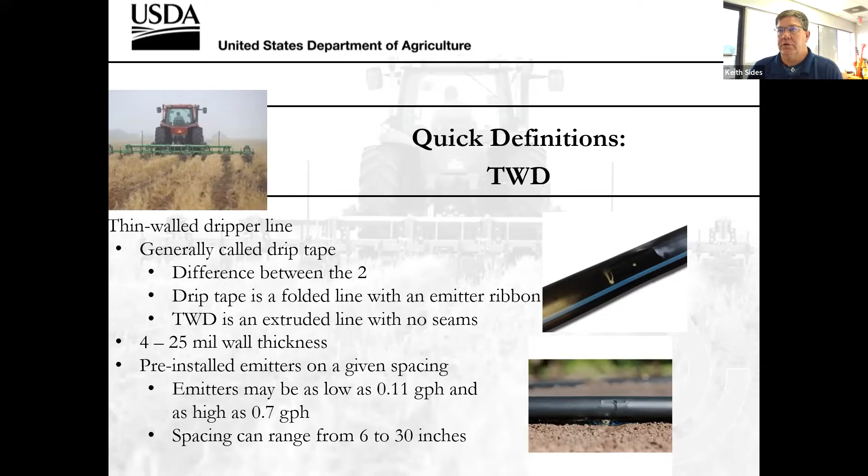This is probably what the greatest majority of you will be using. It's a heavy wall dripper line. You'll hear it called dripper line. You'll hear it called poly line. There's as many names as there are people out there for it. Again, this is an extruded product. It doesn't have any seams in it, so it's just like a piece of PVC pipe. There's no seams. There's no breaks in the wall of it. These are a heavier wall. They're 30 to 35 mil wall thickness. You can get some heavier ones, but then you start running into some different issues with it.

It can come with or without emitters. So if it doesn't have the emitters in it, it's called blank tubing, poly tubing. And what that does is that allows the users to actually put in the emitters wherever they want to and however many they want to at that point. You see these a lot on tree lines, shade trees, windbreak trees, where your spacing between the trees may be 8 to 10 feet between a tree or between two plants, and you don't want to be using that water in between, especially if you're in a limited area, or if you're going to be using your water that you're going to harvest from the rainfall. You don't want to be using that water on something that you don't want, just on blank ground out there.

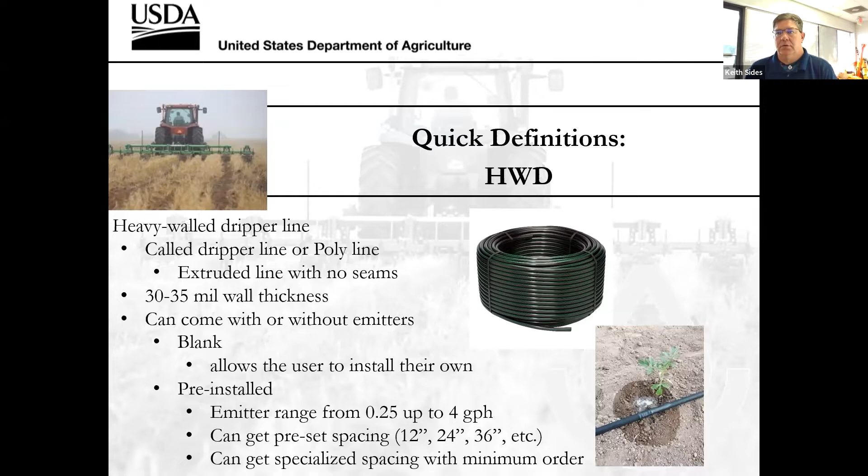So the next part, you heard me talk about emitters. There's 2 styles of emitters. There are PC or pressure compensating emitters. These are really nice for individuals who don't have a lot of practice and don't have a lot of experience with drip irrigation. They work for these individuals because they give you the same amount of water over a fairly wide pressure range.

Most of the PC emitters that you're going to be dealing with and will have access to, they'll start going into that compensation mode at about 6 psi. So you're talking fairly low pressure on that one. And most of them will stay in that compensating mode or have the ability to stay in that compensating mode up to about 60 psi, which is kind of what most people run in their tires on their cars.

Some of them are a little bit higher, some of them are a little bit lower. That is all based on how the manufacturer has set theirs up. They can be pre-installed either in the thin wall dripper line, there is a thin wall dripper line that uses pressure compensating emitters, or in the heavy wall dripper line where you're running a little higher pressure, a little longer runs, or again, you can put them in yourself to put the water exactly where you want it and nowhere else.

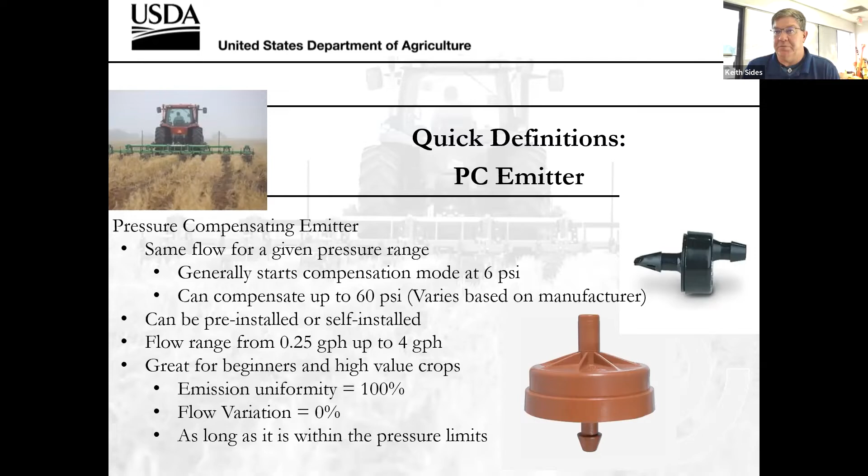On the other end of the spectrum, you'll have your non-PC emitters or just your standard emitters. These are really nice for small runs, flower beds where a little bit of extra water, a little bit less water isn't going to hurt you. They do vary with pressure, and they're not going to vary a lot. When I say vary, I mean we're talking tenths or hundredths of a gallon per hour. So generally these are rated at a certain flow, say 2 gallons per hour at 10 psi. And the easiest way to maintain that 10 psi is with a pressure regulator. We can talk about those here in just a little bit.

What you don't want is for that pressure to drop below 10 psi, because on most of your emitters, they go into what's called a laminar flow, a very, very smooth flow. And so it doesn't burn the pressure and it doesn't stop. It can actually speed up the flow through the emitter, so you can actually get more water out at a lower pressure. It uses turbulent flow. If you've ever seen one of these emitters, they look like they have a labyrinth or a flow path that does nothing but drive back and forth, back and forth. All it does is create turbulence inside that emitter to burn the pressure so that you get the right amount of water when it comes out.

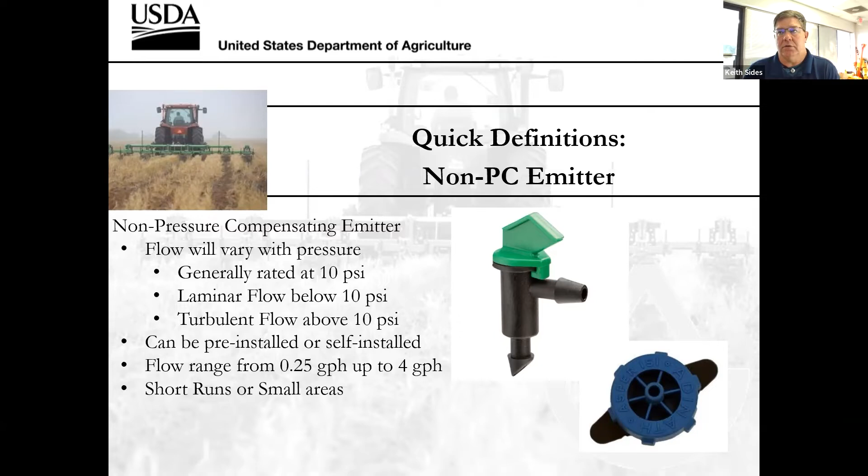Again, these emitters can be pre-installed on any kind of given spacing, 12-inch, 24-inch. It just kind of depends on what you are looking for in your application. And they can go up to 4 gallons per hour. These are really nice for small runs or short runs where you're not going to have a lot of pressure difference from one end of the run to the other, or one end of the row to the other. Flower beds, flower pots, that kind of thing is where you're looking at these non-pressure compensating emitters.

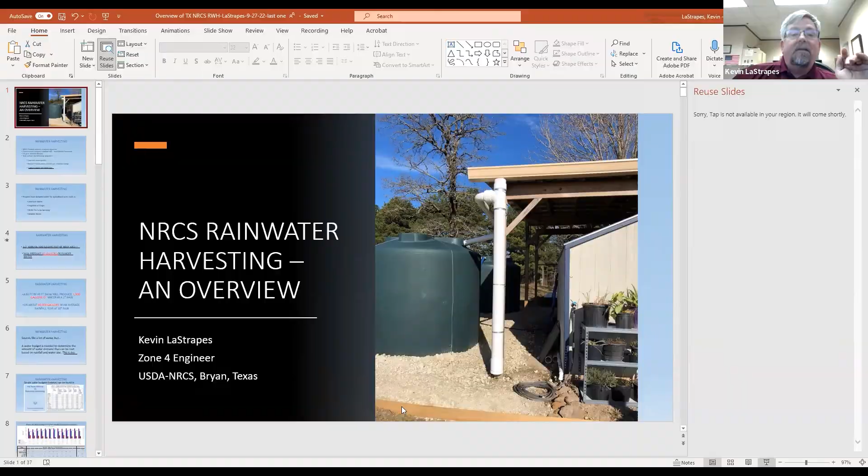Great. Okay. So here is a little East Texas system for someone who just has a few acres north of Palestine, near the huge metropolis of Montalba. They have some gardening aspirations, truck gardening for profit, but they're slowly building. They're also raising a family. They work day jobs, and they've been doing this on the side.

And this was a system where they were able to use one of their sheds. Their little RV is back here, and there's their garden shed here, and they've been experimenting with it for their own use, friends and family. They haven't really sold anything yet, but that's been their decision. I got to go on a review visit with them a year and a half after they installed it, and they were just super happy with it.

And I asked them, what would you do differently? And they actually said, well, I'd make it larger if I could afford it. So they feel like these two 2,500 gallon tanks fill up routinely, but we're in a rain belt of 40 to 45 inches there in Palestine. But just to give a little background, and then we'll get back to real pictures of real jobs.

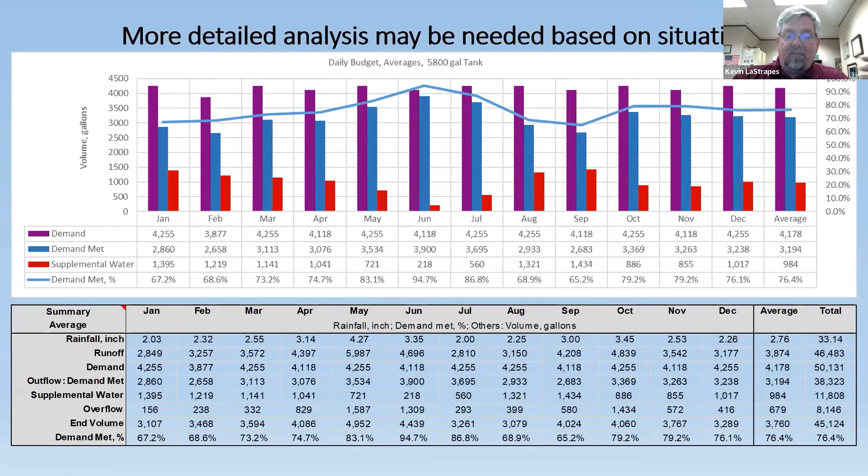You just have to make the best guesstimate you can. And we use this rainfall data to come up with the percent demand that you're likely to meet in an average year. This one actually got close in June, because wherever this location was, that happened to be one of the higher rainfall months historically. But it would vary, based on where you're at.

So that was a note to myself to do, and I didn't get the time to do it because that was where my jobs were. I was going to show you the real info from my job. I've seen them down as low as 30% meeting the demand because their irrigation demand was so high.

Well, if you're paying a rural water system a water bill, and you can take 30% off it every month, and it's not always a direct correlation, you will get a savings, even if on average it ends up being that much effective water from the rainwater harvesting system. It's just something that you have to make plans for, and then manage it the best you can as it actually rolls out each day, weather-wise.

And Mr. Wade, if you don't mind, so it'll save time. Any question you see that comes up in Q&A that is something about the slide we're talking about or the topic, I don't mind stopping and talking about it right then. If you just want to say, "Hey, Kevin, I got a question," I won't consider that interrupting at all. There's always going to be something on my slide people can read if they're not interested in the question.

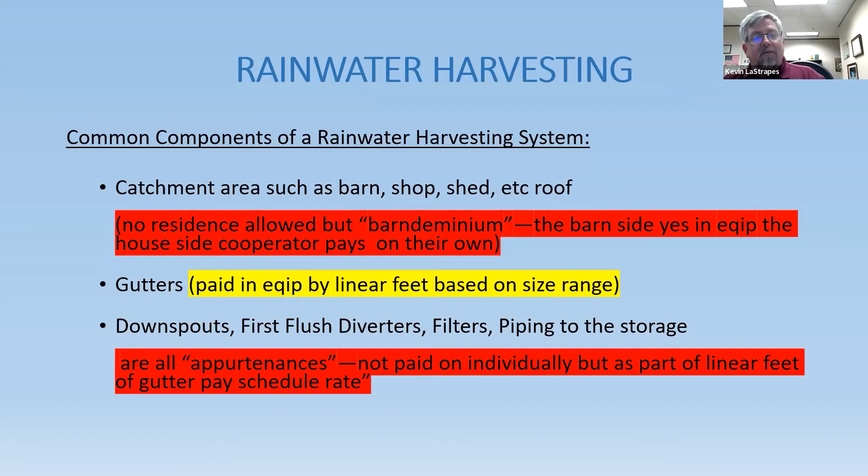So I'll just say, if y'all ever do work with us in EQIP and you want to share your costs with us, we will sure take that information, keep it private, and use it to fight for better cost in Texas. That's kind of what I've told the folks in my zone, and what I do in working with our cooperators on every kind of practice, just to bring some reality to what the economists are getting from cost guides and different inflation rates and stuff like that.

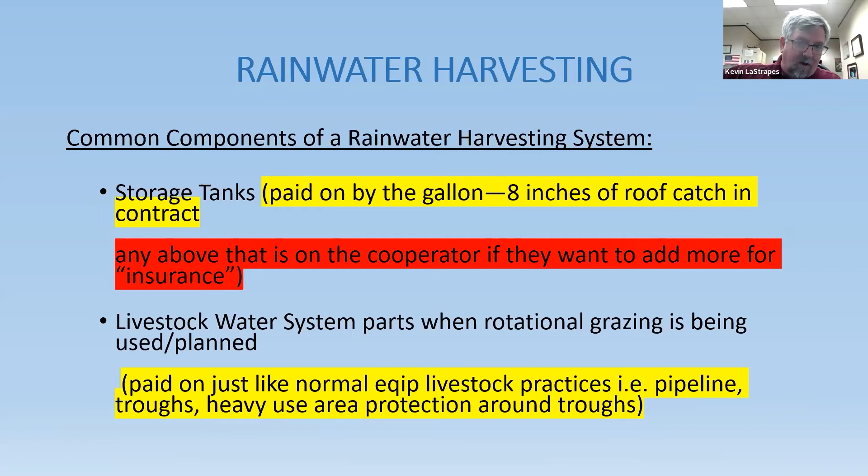The storage tanks are going to be paid on by the gallon. The gutters are going to be paid on by the linear feet. And then the livestock water system that you hook up that water to is going to be like a normal livestock water system. In fact, like I said, you need the reliable thing. You're going to have your well hooked into your livestock water system, and this is just going to be supplemental water, but they'll both be plumbed in. That was what our one producer did, and I'm going to show you his system later.

So the catchment area is any roof. It doesn't have to be the barn roof. It could be a shop roof, it could be a shed, anything that sheds water that has a sturdy enough side to it that a gutter can be attached. If it's a metal building, you can attach it to the truss ends by welding or screwing it in with metal screws, or there's wood fascia boards that get screwed in. It just depends on what building you're trying to gutter.

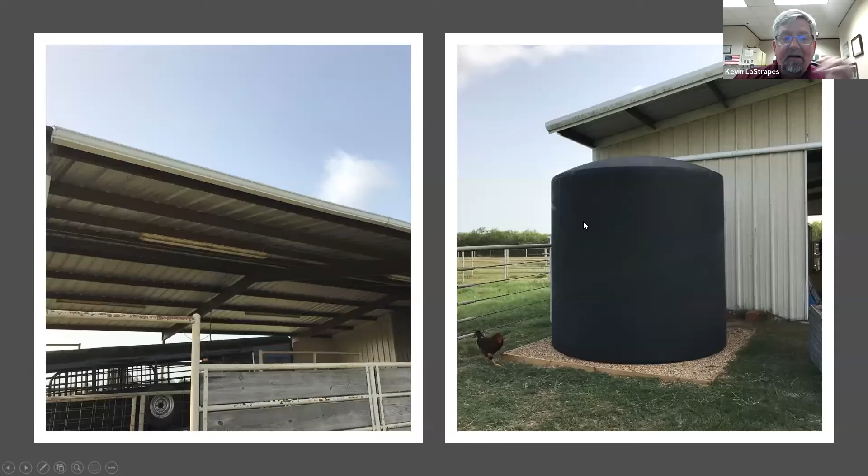So here is one that was, I would say, a very small scale livestock water guy. He was not doing any irrigation. He was watering more than that one chicken, I promise. But he had a little part hay barn, part animal protection barn right here, and got it guttered on both sides and ran the water. This long pipe here is coming from the right side of the building. And then he has a configuration over here on this side to catch it and put it in this storage tank.

Notice we also like to have a good solid, stable foundation. This is batter boards filled back with pea gravel. And it worked great to have a nice flat foundation for his storage tank.

I have a quick question. Sure. Just while you're hitting that, sorry for the interruption there. No interruption. There's a question that says, should one be concerned about building a foundation after installing a rainwater harvesting system?

Just for the storage tank, because you don't want it to get uneven on you and have erosion around it. So we usually try to get a nice foundation pad. Some of the manufacturers want you to cable it down. You'll see a picture where one cooperator needed to do that. Personally, I think the weight of the water is going to keep it down, except maybe in West Texas, it might need cable down, because in a drought, when it gets low and empty, they actually will move. The wind will move them. So it's not like it's not possible, but it's more possible in West Texas than it is in our part, in East Texas. But again, it's an appurtenance of the storage tank price.

Okay, so here's another question that's in the Q&A, and I'm not sure if it's something that we should forward to you later on, but I'm going to read it anyway. Okay, go ahead, in case you want to answer it now. I'll put out this table and other stuff so y'all can just read it while I'm answering this question, because this is just purely informational. Yeah.

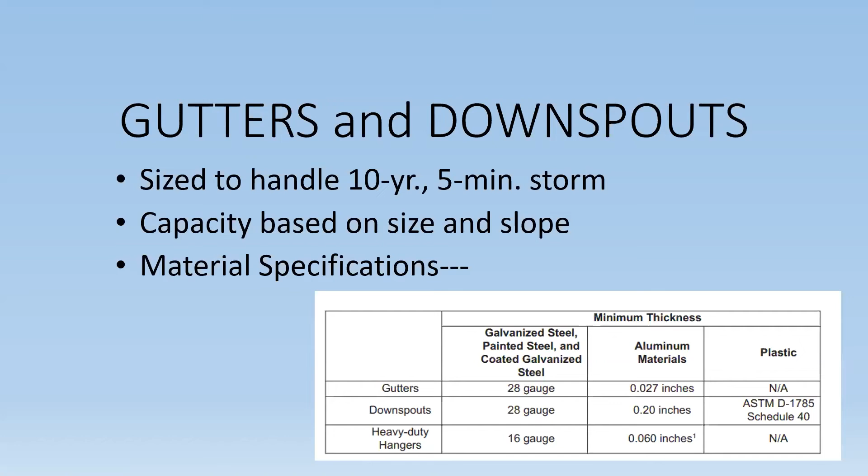Okay, appreciate it. So it sounds like this person has a 30 by 47 residence with a 20 by 30 carport storage area, all with existing gutters. What would be the other required monetary outputs for the landowner? So am I understanding, do they already have gutters on the whole residence and carport? That's how it reads. It says all with existing gutters. Well, if they do,

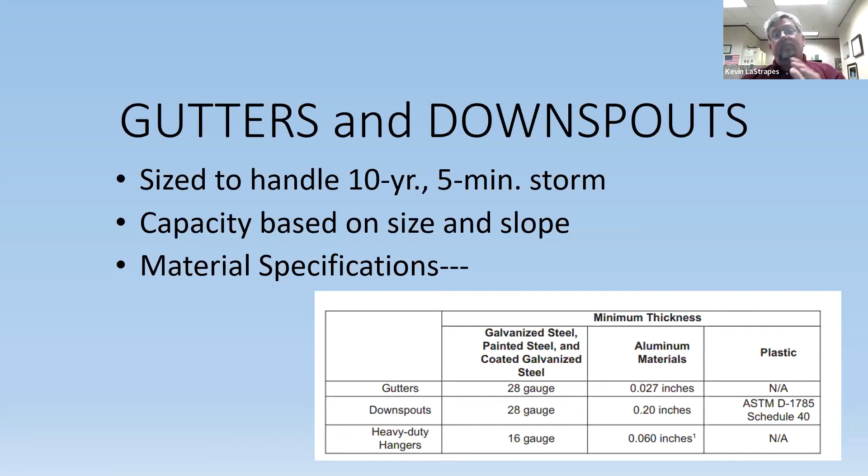Willie and his fellow planners, and he was a former planner, y'all, before he started doing what he's doing now, they would just have to work with you on what would make a good or an allowable contract bid, I guess. But I'm thinking you might need to add one little ag building to that scenario and collect water from everything. If you've got an ag use for the water, then that's reason for collecting the water. But you have to have 558 in there.

I haven't seen a storage tank only EQIP contract. I'm not saying it's impossible, but it would be something that would need to be discussed and worked out. But we are totally open to taking whatever resource.

I mean, we have a fancy word for it: resource concerns you have when you walk in our door or call us on the telephone, and we want to go out and visit your place, get to know you, get to know what kind of economic enterprises you're considering, and help develop some good alternatives for you to go there and achieve that.

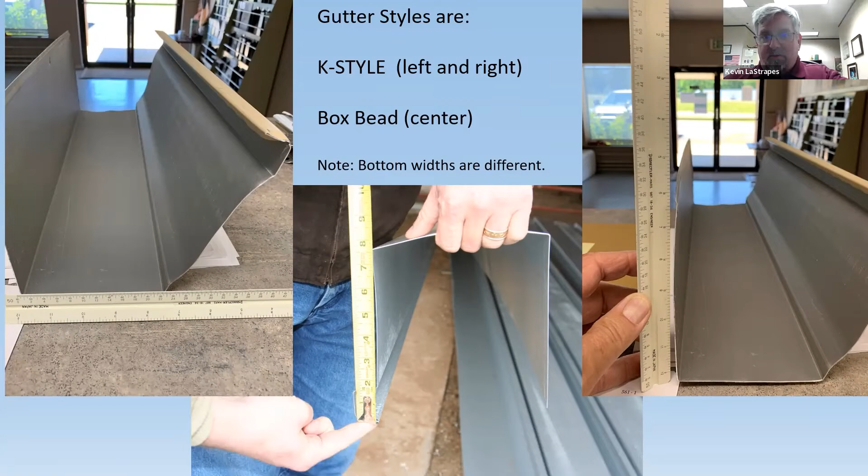And it's not a whole lot more that a box bead will carry, but basically what my cooperators have done is shop around for whichever's available and cheaper per linear foot, and that's the one they're going to get. And we always give the option of what's the smallest K style, so like a 6-inch K style, and a 5-inch box bead will carry the same amount of water usually.

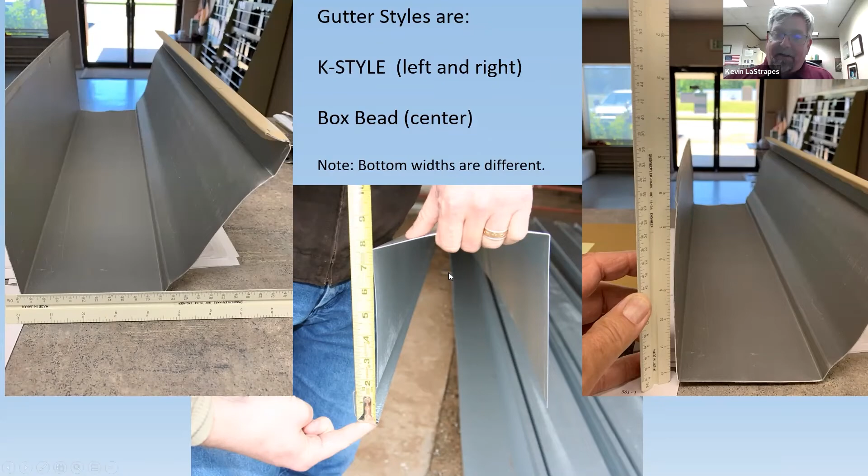But if the 6-inch K style is cheaper, you should get it instead of hunting for the 5-inch, just because you think in your head, oh, 5-inch is going to be cheaper. Not always. So there is a lot of research.

And here's the Palestine lady that did her own project and bought the parts. She and her husband put this stuff up. And that's where you can kind of see, you've got to use your imagination. It looks like a K, I guess. I never can see the things in those pictures, but it definitely looks more like a K than a box. So I'll grant them that. This was a K style one. And she's just showing the different dimensions there for the photo.

This part right here under the gutter, you're about to see the inside of it, is the downspout. It's a very short one into the collection pipe. Oh, there's my little question. Do you see the K? I talked ahead of my little thing.

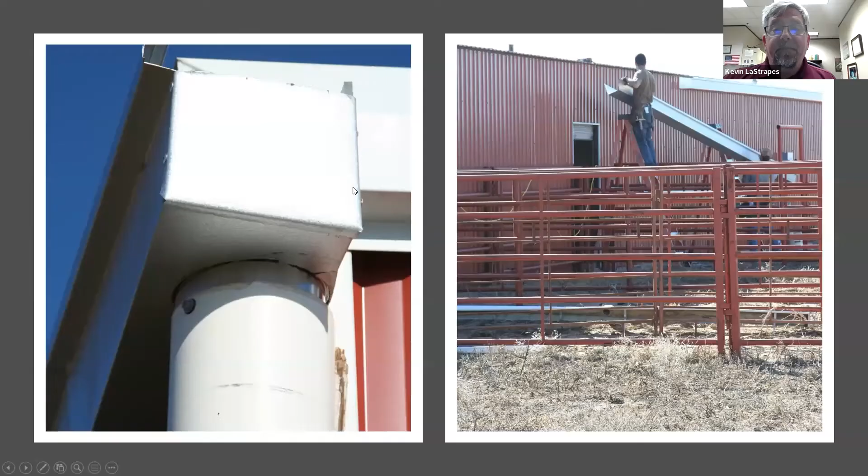So now we go out to West Texas and we see that box bead installed. And both kinds will have the supports, and then there's a screw, you'll see a picture later, that goes into the fascia board, or a metal screw, and keeps this supported into the wall. And here they are installing it.

This is the true box. Do you see the box? Well, yeah, that one's easier to see, I think. And that looks like a little K there because it's leaning out. But as soon as they put the brackets on top, what kind of looks like the K in the other one is more like a batter board, where the water runs off the roof and has to come into the gutter instead of jumping out of it.

That's your main goal with the size of the gutter: for most rains, that 5-minute intense rain that you saw as our design rain is what we're trying to catch and flow in these gutters so that you don't have spillage. You're trying to minimize spillage out of your gutter.

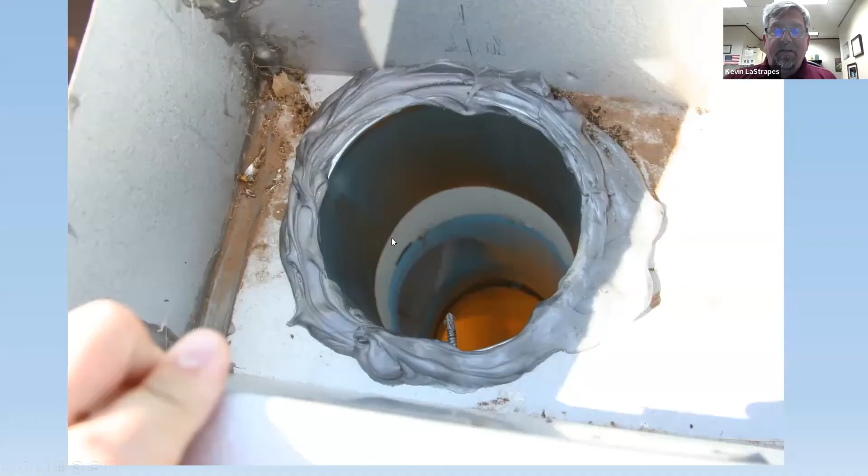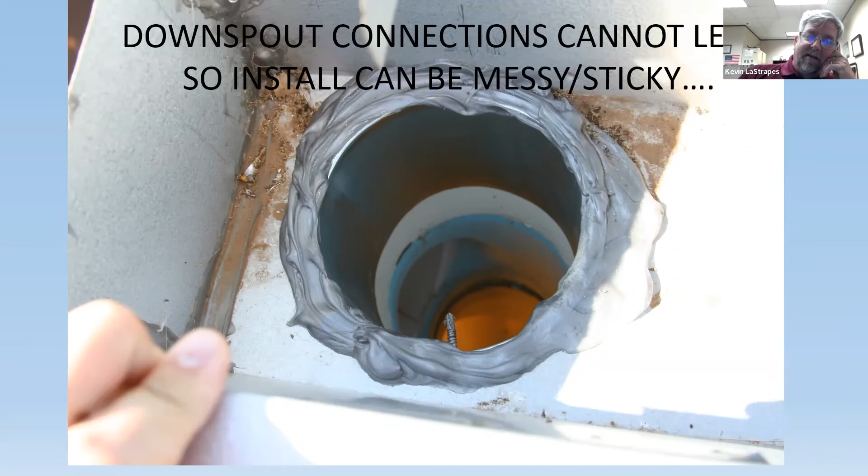And then, with anything with water, you've got to have good seals. It can get messy and sticky when you're having to put the mastic and whatever to get these kind of deals, because sometimes the plumbing parts are not the best fitting, and you have to use unlike materials, metal to plastic. It works, but you have to do a little extra effort to make it fit snug and not leak.

Now, the thing that this will go to after the downspout and before it goes to your tank: that first rain, just like the first rain when you're driving on the road is the most dangerous part of driving. Well, you have a lot of yuck on your roof that you don't really notice until you start to collect it in a storage tank. And you don't want that to go in your storage tank.

So you use gravity as your friend, and you make a large enough pipe that the water has to travel over and drop in and fill that pipe. And then settlement happens, and the sediment and trash will go on down to the bottom of the pipe. Okay. And that's what your goal is. And at the bottom of that first flush, you have a clean out plug.

And I meant to add that most people decide it's best to drill a couple of holes, like weep holes, to just let the water out of that so that they don't have to go and get any plastic or metal pipe, grooved pipe cover that you're supposed to hand turn. Well, the day you put it on, it'll hand turn that afternoon. Three days later, you've got to get your wrench to get it off.

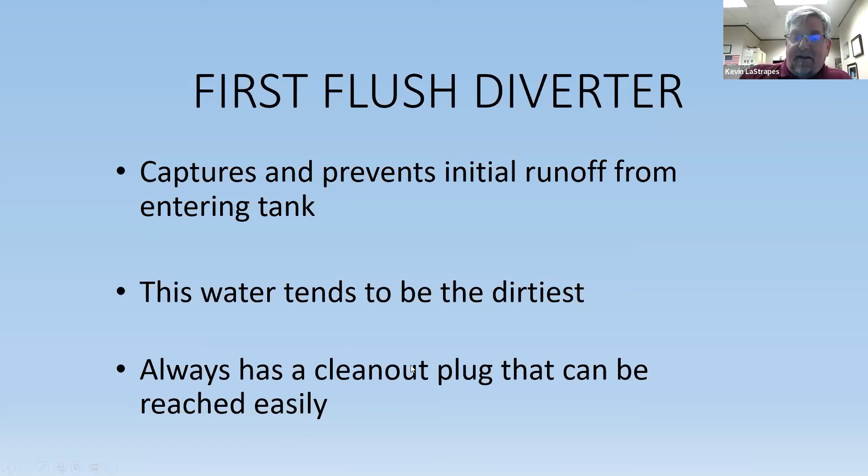And so they found a practical thing: drill some weep holes, and they only have to wrench it off to get the crud out every two months or one month. It just depends on how many rains you get and how dirty the roof was. And they kind of work with the system. And so this is what I'm talking about, the square wrench, pipe wrench kind of clean out that you can take off if you need to.

So here's our biggest East Texas producer system. And he has 4,500 gallon tanks in his system. So really big, right at 27,000 gallons he's collecting, but he's trying to water a regular size herd of 20 plus cow calf and not use his well water that much. So it's gonna be interesting. I've kept a relationship with him. He's only had it in this drought year, so it's not a good year to tell how much it's helped him.

So Kevin, is it important that he used 6-inch or 4-inch gutter? How did that play a part in determining the gutter that you're going to put up? Yes. Okay, so that'll be part of our design process: to put a little slope in the gutter, put strategic downspout locations, so you can shorten the amount of catch, so to speak, out of the gutter that you're going to get, and that will keep your gutter sizes down if you have a really long roof.

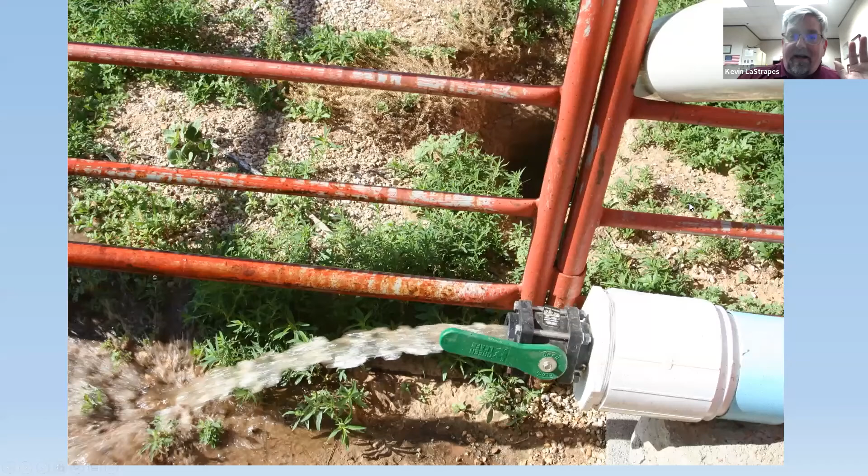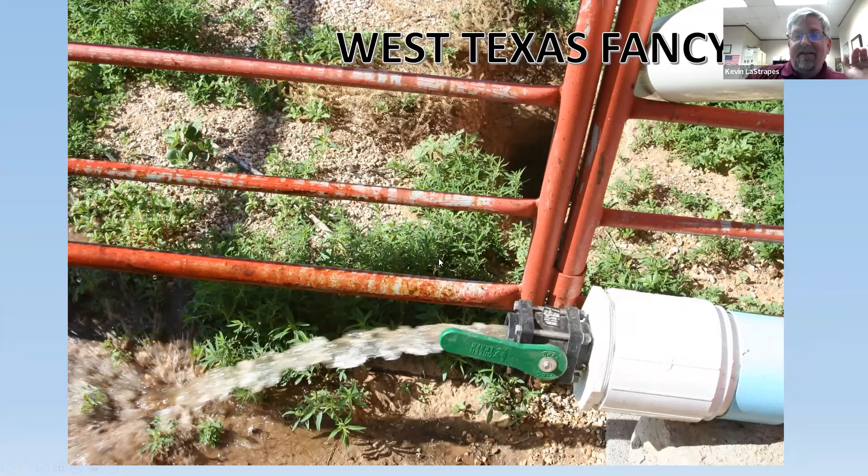And in my thing, I can't see the bottom of this, but you're going to see this is the West Texas one on the right, and they just do things a little fancier out in West Texas. This is his, not weep holes, but an actual irrigation valve that they put in to their first flush to drain that water off. And you can see it looks fairly dirty. So that's been working for them.

Now, storage tanks, size of tanks can cause you some challenges. You've got to design them based on the height of your building because gravity is your friend. Elevated tanks, we haven't gone there yet. Don't think that's going to be cost effective. So we try to make it where they will gravity flow from the edge of your roof into the tank and through some type of piping on maybe the side of your building, to get it over to the tank.

And then we always put an overflow on these rainfall storage tanks. We also do it on our livestock water storage tanks. But the reason we do it here is there is always going to be a storm that you weren't expecting and above the design of the system. And you're going to, unfortunately, quote, waste some water. You can try to route your overflow pipe to something useful if you want to, your goldfish pond or whatever, but you definitely need it so that it's not coming out the top of your storage tank, but it's routed somewhere.

Also, we found out just in the last year that manufacturers are getting a little more picky about requiring anchoring, but in particular, flexible PVC hookup. The Enduraplas company particularly has said that with this East Texas guy that I'm showing you pictures of, and he had to buy this flexible PVC hookup. Not very expensive, just a different way to go from the bottom of the tank into your buried line that's going out to his livestock watering system.

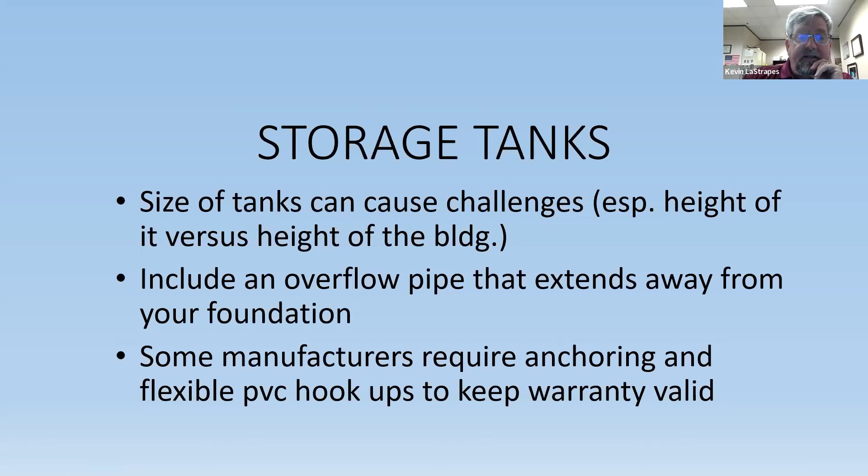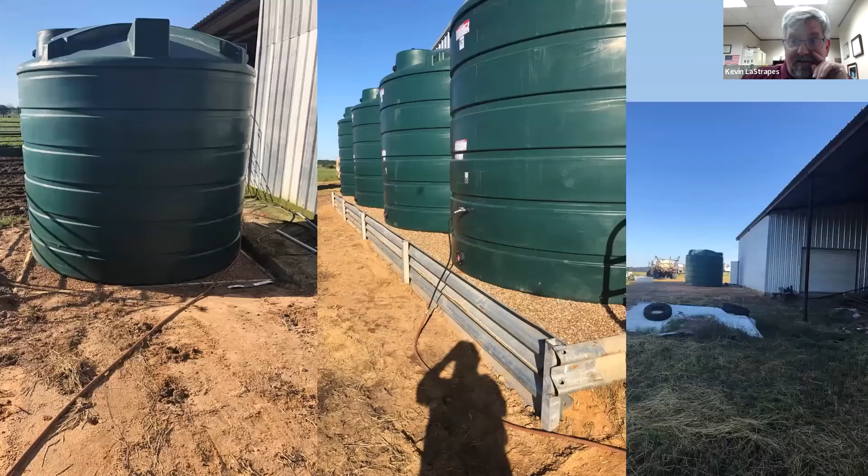So here's that big West Texas system. You get a picture of how big their barn shop animal resting area is on both sides, and that they have 4 tanks that I think are 4,000 gallons. So a little bit smaller than my East Texas one, but big. But just because I serve East Texas, I'm going to say we're bigger. At least on this job we were.

And so here he did the work himself, y'all. So you notice nothing's hooked up to these tanks. He went and bought those tanks, went and hauled them himself, and put one up at a time. Did 4 of them, did all this work before he ever hung any gutter and collection pipe. That was his mode of work that he decided to do. And it worked out well. So each individual can decide how they want to install the system.

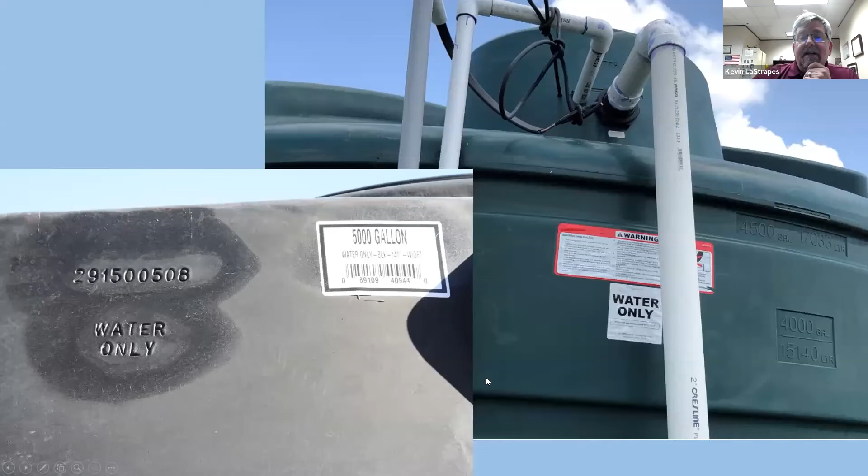Just work with the NRCS office and the staff will help you plan it out, based on what your circumstances are. This little hose here is purely his need-some-water-from-his-storage-tank hose. And that was just my little brag that they have 4 5,000 gallon tanks. I'm sorry. So 20,000 gallons total. And we had 6 4,500 gallon tanks. So it was bigger.

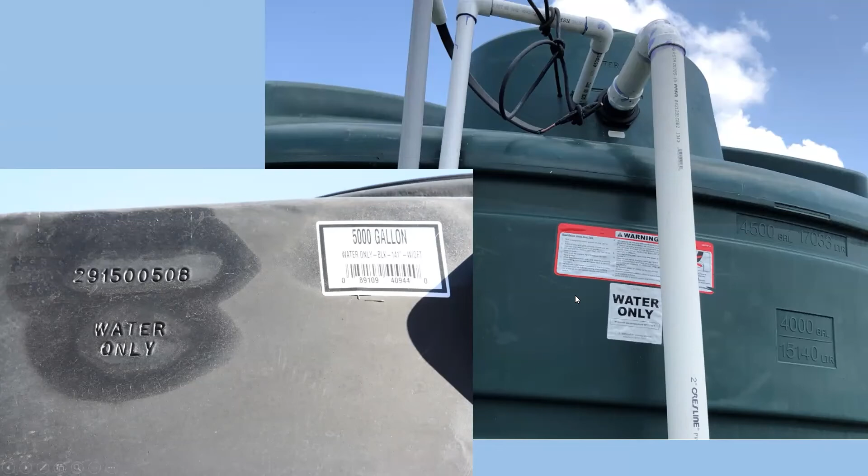And then here they are side by side looking at the stamping that you'll get on them. The left one is a Norwesco tank. They're also marketing a rainwater tank under... no, mine's a different name. It's going to show up in one of my slides. Wadley or something like that. It's some Wiley odd name. Wiley, that's it. Thank you, Keith. And it's in Duraplast.

Now, this stuff at the top is operator designed. He wanted a system that would fill his tanks with well water when the rainwater wasn't happening. So he has ability for rainwater to go in here. Because he's depending on this for his livestock water, y'all. And it happened to be that his barn was in a high part of his property. Everything can gravity feed from it. And so he wants to distribute from these tanks into his livestock water system. So he has it automated to sense the level in that tank and come on and add well water when needed.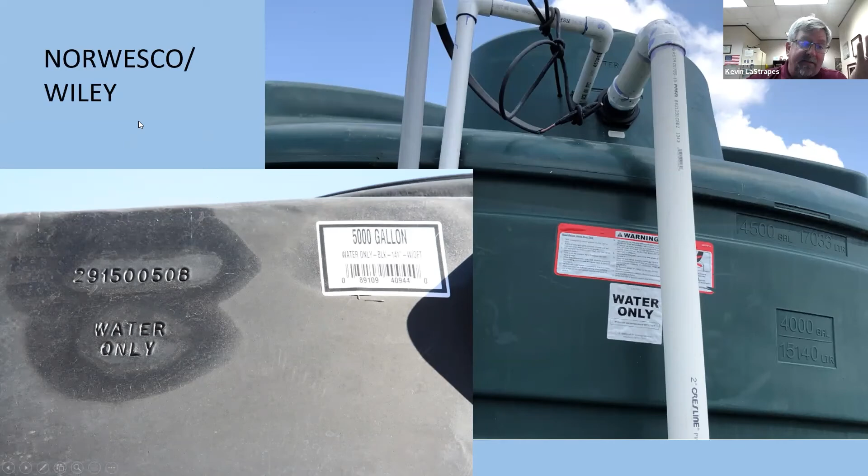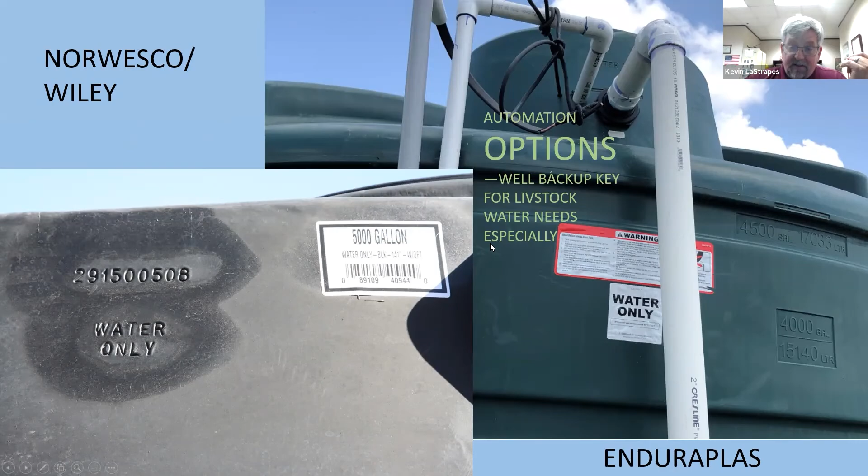So, oh, there it is. See, I just didn't press my thing. I had put it on there. Norwesco and Wiley and automation options. So there's again, plan a backup.

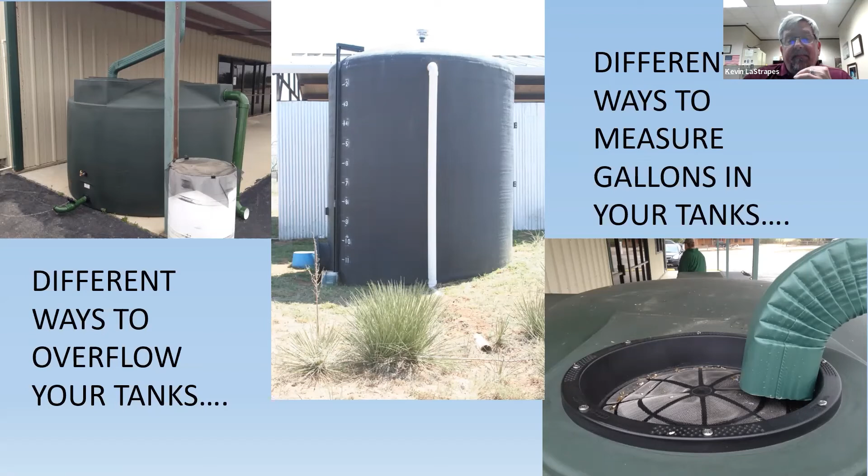Well, we would have to be able to get the water into the gutter. That's the key thing. I didn't show a picture of a building on my aquaponics place here. These two pictures on the left are from a really neat aquaponics nursery that did a rainwater system with us here on the edge of Bryan. And I have more slides to tell you more about later, but basically they had a weird shaped roof building, kind of greenhousey shape, over their fish raising part that they use.

And it just didn't catch enough water because the gutters had to be about 10 inches down the edge of the building. There wasn't a way to attach it right on the edge. So it just would be something we'd have to look at and decide if masonry screws could screw it right to the adobe and catch it right on the edge or not. So it just would have to be looked at. But like I said, we're always open to looking at any building you want a gutter, and we'll give our best advice on your options with that building, or help you narrow down.

So, okay, I want this system, but I need to do it in stages. So here's building A I'm gonna do first, and then here's building B, and then C, and do it in stages.

This was a neat thing out in West Texas. Notice the yucca plant, and he marked his system and had some type of, Keith, is that an add-on that he was able to buy as a rainwater thing from the Norwesco folks, or did he make this? I think he made that. It's just a piece of clear tubing on the outside that will show where the water is inside the tank.

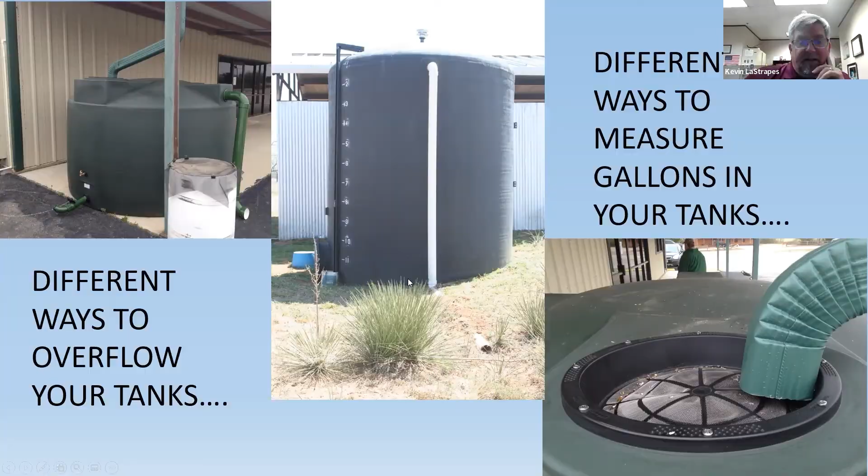But it's only a 4.5 foot tall tank, maybe 5. So their tallest person that works there can look over in this hole and see where the water is if they have to, and you can develop, like thumping a watermelon, figuring out where that water is in the tank, but it's not super accurate. That's why the gentleman did these nice painted numbers and made this little clear tubing so he could see where it was and do his planning. So, again, design it to what your individual need is.

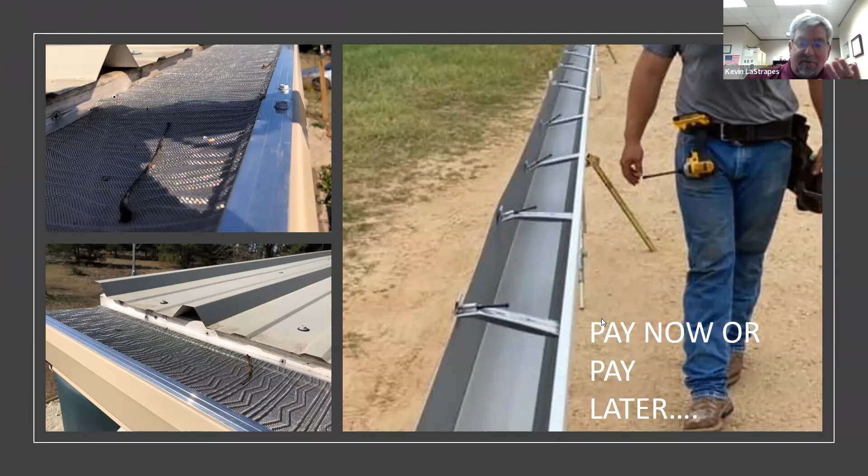So here we're back on the place in Montalba, tree area of Palestine. They didn't have a bunch just right next to this outbuilding and their home, but the leaves blow in. I'm sure your grandmother and grandfather told you this before in the past, after you learned the lesson the hard way. They reminded you, you can pay now or you can pay later. So my opinion is pay for that leaf guard.

This one was well designed. See how it's screwed in here, strong. It's going to be easily swept off and cleaned off if it does get clogged. So well worth whatever extra money they paid for it over the long term. You're thinking 15 years, that gutter's going to at least last 15 years and hopefully longer. Go ahead and do a few of the extras that save you maintenance time.

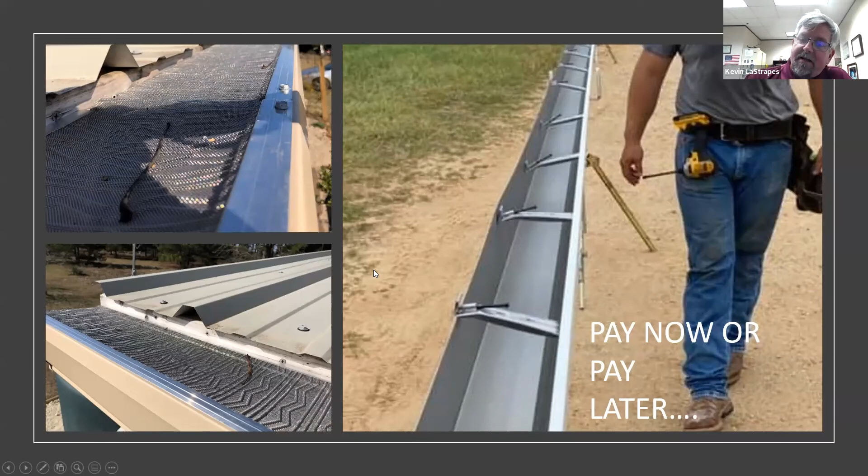And here's those long screws that I was telling you about. They assembled this on the ground, and then they put it up on the side of the building and started screwing it into their fascia board with these long screws that are equally providing support across the gutter and attachment to the building. So pretty neat system. Now we're back to our livestock guy. This is how big a place he had.

The area to the left and right of this is his hayland. So he had quite an operation, but he ran cattle in the yellow paddocks. And he had a system that he also was pretty entrepreneurial. He thought he wanted to become the used equipment tire livestock trough dealer for East Texas.

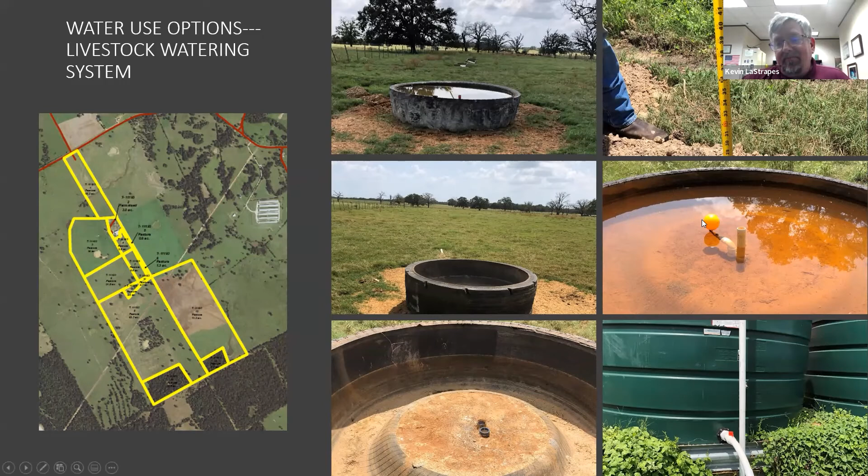Well, he likes his installs and he likes how they work, but his supplier, who wants him to be his dealer, didn't communicate quickly or well. So I don't think he's going to do it. He didn't give me a name that I can pass on, but I'll just say I ran across one that was kind of pushy one time about 10 years ago at a county fair about these. And these look a lot better than the ones that gentleman was selling.

So it's all about, besides pay now or pay later, show me the money, show me the product before I buy it. And I would definitely do that if you wanted to do an unconventional type of trough. But like I said, his is working pretty well and holds more water than I thought it would.

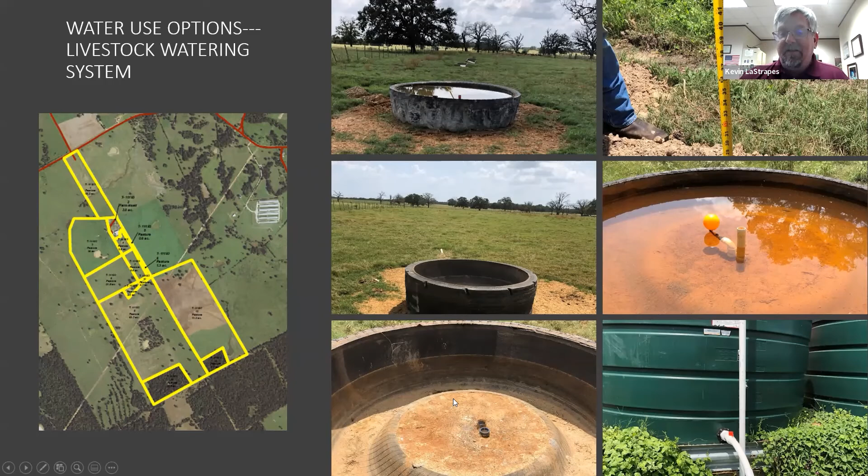Side note, the leaking part is the concrete in the center here of the tire, and that seam between tire and concrete. That's where your trough's going to leak if you don't do a really good job of installing there. And it looks like he did it well.

Now here, I was just going to check, is Mr. Lewis Morgan on this call? Because at one time, I think he was a part of y'all's group, and Willie worked with this gentleman before he left Bryan. I think, is that right, Willie? Yes. Yes.

So he had a shop building, a little bit away from his house. He also, which I did not have a picture of, his hoop house. He did a hoop house first with us, and then he decided he wanted some better quality water and water he didn't have to pay the city of Navasota for, because I think he was right on the edge of Navasota. And so he did a guttering system with us, a rainwater harvesting system.

And I believe the smaller tank was something that he added on his own. At the time, and this is still in, we did not have a way of attaching gutters to any of the hoop houses, whether it be a kit that was supposedly manufactured to go with that hoop house or not. It was a pure rule thing about lifespan.

Hoop houses have 5 years of expected life, gutters have 15, and we couldn't put a 15-year life thing on a 5-year structure. That's being discussed in the urban conservation realm, and we'll see where it goes in the future. But again, we could put the storage amount from the hoop house that he was planning to gutter, and that's what we did.

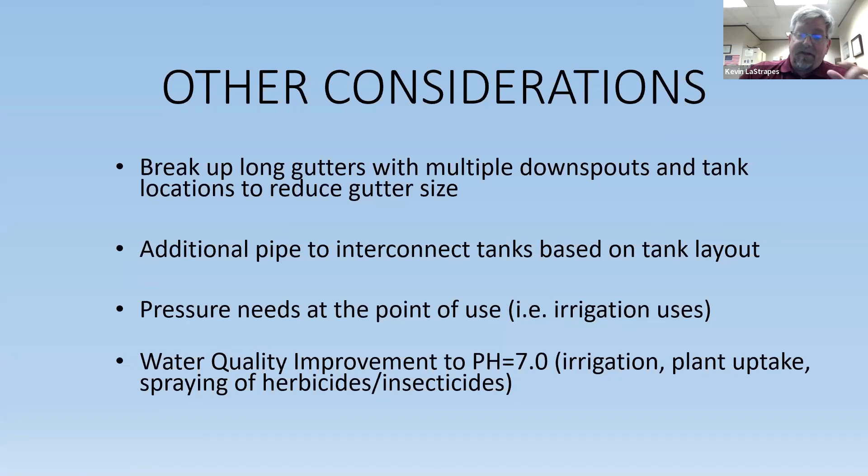So it's just like any other conservation practice, you just got to put a lot of pre-study and thought and consider the alternatives and get some costs on them and then decide which one you want to do.

Any questions? Sorry, I've gone over. A huge part of that reason is because of my technical difficulty, and I can't believe I had to put an hour's worth of slides in 15 minutes while Keith was talking, but you saved me to at least finish it out. The version that came back after my computer had to be shut down was not what I had actually done for y'all. No, that was a beautiful save. The information that you provided was right on.

Yeah. So we kind of talked about this, but Mr. Wade asked me to anticipate some questions, and the first question is, how do I get help on these? Well, just call the local USDA NRCS office and tell them that you want a field visit, and mention the rainwater harvesting part, because not every field office person is versed in that yet. It's still a fairly new practice. And if you tell them that up front, they might be able to schedule someone close that has done it. We have several technicians that do it regularly, and field engineers and myself. So just make it known that that's one of your resource concerns that you're thinking about.